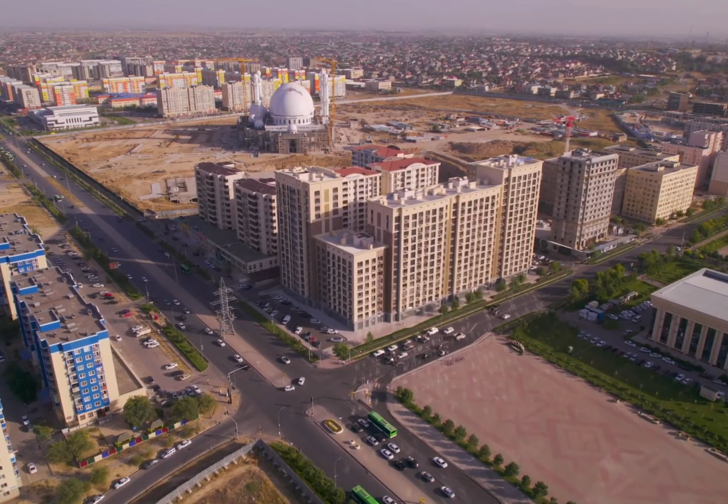Today, Shymkent's economy is diverse, with strong sectors in pharmaceuticals, food processing, and metallurgy, reflecting its ongoing development and modernization efforts. The city has also become a center for cultural activities, hosting numerous festivals that celebrate Kazakh traditions, music, and art, thereby preserving its rich cultural heritage while embracing modernity. As a city that seamlessly blends its historical roots with a forward-looking vision, Shymkent embodies the dynamic spirit of Kazakhstan, making it a fascinating subject of study for those interested in the intersections of history, culture, and economic growth in Central Asia.

A modernized tulip, embodying the characteristics of biodiversity, photovoltaic potential for renewable energy, and digitization in line with a smart city, was selected as the emblem for the project.

Being one of the fastest-growing cities in Kazakhstan, Shymkent has a demand for urban planning of new microdistricts. This video presents the urban development strategy for the new neighborhood of Shymkent City, developed by a joint interdisciplinary team of frame art and urban sustain architects, led by architect Alexandr Khvan and urban planner Roman Pomazan.

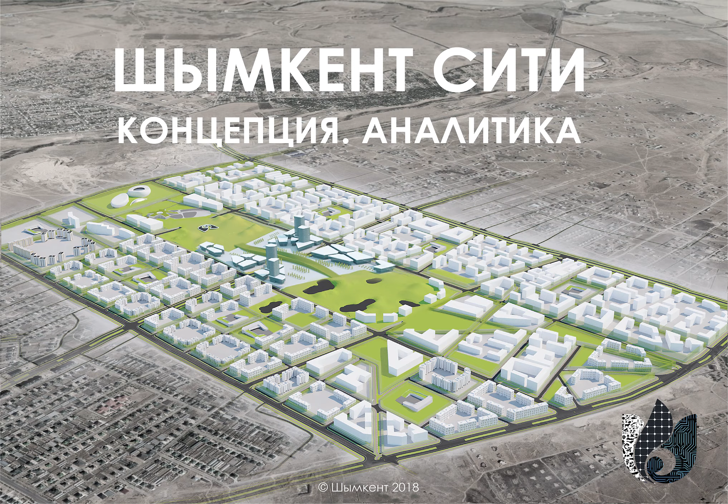The strategy examines domains of urban planning and architecture, transport, culture and creative industries, natural environment, and participatory development, applying to the new neighborhood and the entire metropolis. Except the strategy, the project consists of the analytic and planning stages.

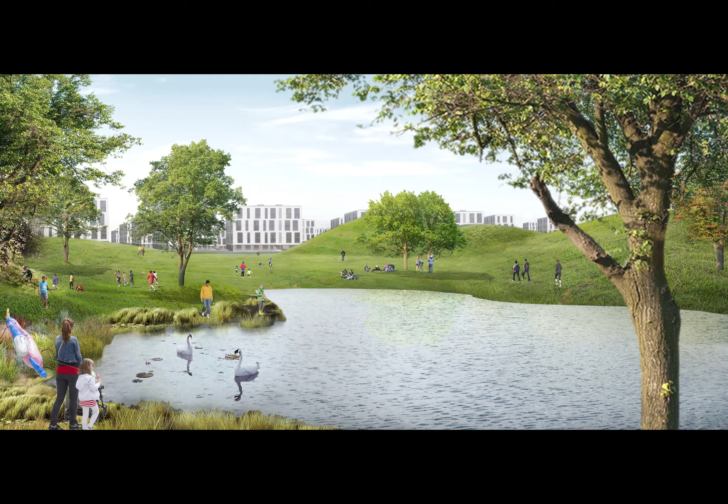In the last decade, a tulip was chosen as a symbol of the metropolis, owing to the endemic species of wild tulips that are ancestors to all modern varieties of tulips.

During the analytical phase, we evaluated the conditions and potential of Shymkent, which included workshops, analysis of the urban core and social fabric, green and gray infrastructure, economics, culture and city values, as well as sociological and anthropological studies, and the brief evaluation of the cultural and creative industries.

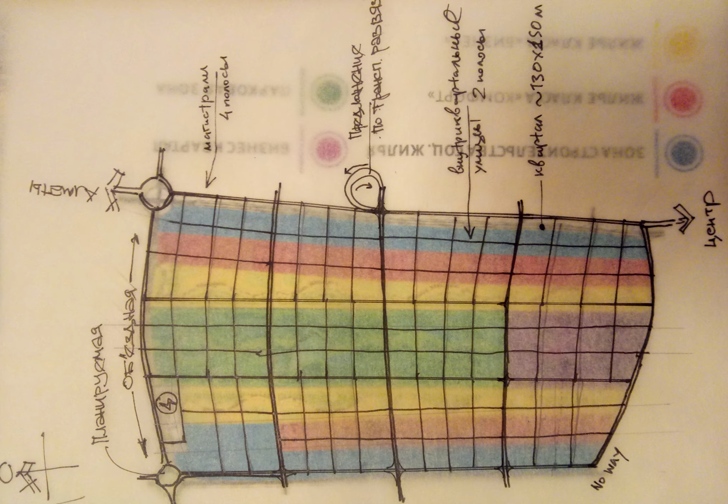First, we conducted a field trip to identify the value of the natural landscape, key nodes, and to meet with stakeholders. The local business association, international real estate holdings, regional sports association, and local hospitality companies were the main stakeholders of the project.

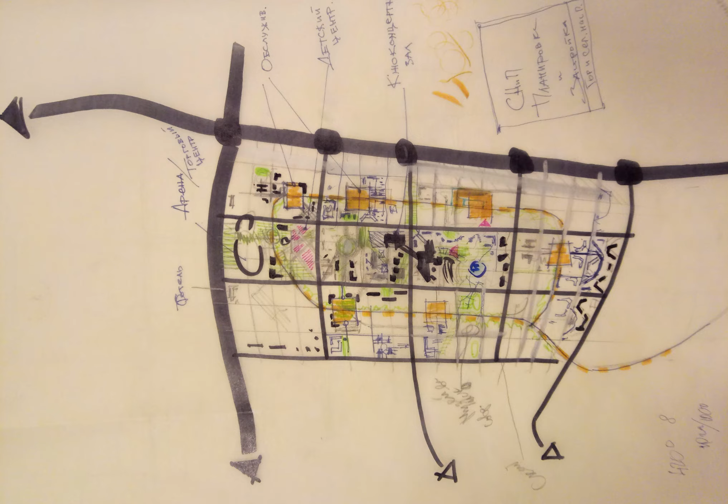The initial workshop aimed to generate a variety of zoning plans, which would then be overlaid with analysis data for further detailed elaboration of a selected option.

The designated plot already included several households, commercial entities, and social housing units. Additional challenges included public transport connections and the placement of large urban nodes for sports, entertainment, and the business district.

The urban studies begin with the evaluation of city designs across the entire metropolis, identifying several historical cores of medieval towns, traditional and modernist cities, and rural developments. Among these, to the north, lies Shymkent City.

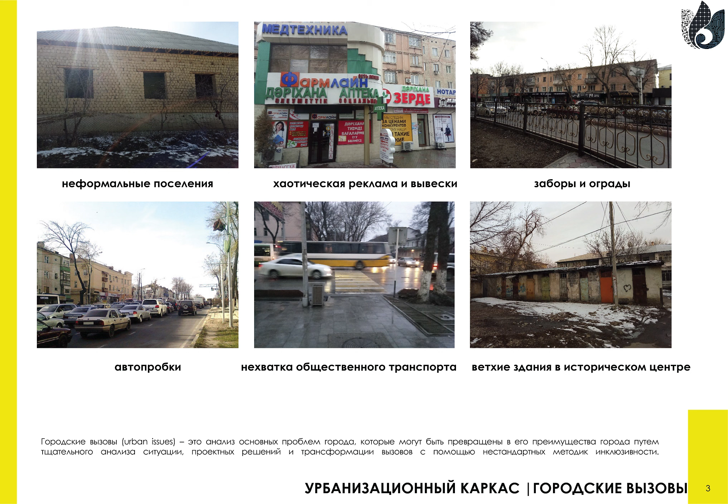The analysis of urban issues identified 12 main concerns: water access, public transport, waste access, urban sprawl and informal settlements, traffic jams, and several others.

Transport studies revealed the project site's relation to main logistic nodes and lines. It was revealed that the city project lays quite far from the central transport hub and needs a new transport rail and bus hub. Studies of the social fabric unveiled the existing and future connections of the site to the old center via a chain of public spaces.

Future expansion of them throughout the project fabric could sufficiently raise up the quality of urban environment.

Nature studies identified potential green belts, relevance to an ecoregion, and endemic species. Semi-arid dry climate and scarce clay soils highlighted the value of greenery and water sources and the need to revitalize the planned area with biodiversity design.

Economic studies reflected trends in population growth, demography, occupancy split, main economic industries, industrial zones, and the macro and microeconomic context, as well as the real estate market.

In 2018, Shymkent was approaching the 1 million citizens mark, which anticipated the transformation of the metropolis into a city with special status. Cultural studies define the metropolis as a cognitive map, key cultural authentic features and values, and the genius loci.

While the history of Shymkent dates back to the 6th century, there are several medieval fortifications, examples of vernacular Central Asian wooden architecture, and valuable modernist buildings from the 1970s to the 1990s.

Anthropological studies uncovered the regional tourism potential, festivals, local communities, toy and entrepreneurship traditions, and the cultural and creative industries. A distinguishable feature of locals is the trend to live in mahallas, low-rise micro-communities that amalgamate all family members and contribute to the urban sprawl tendency.

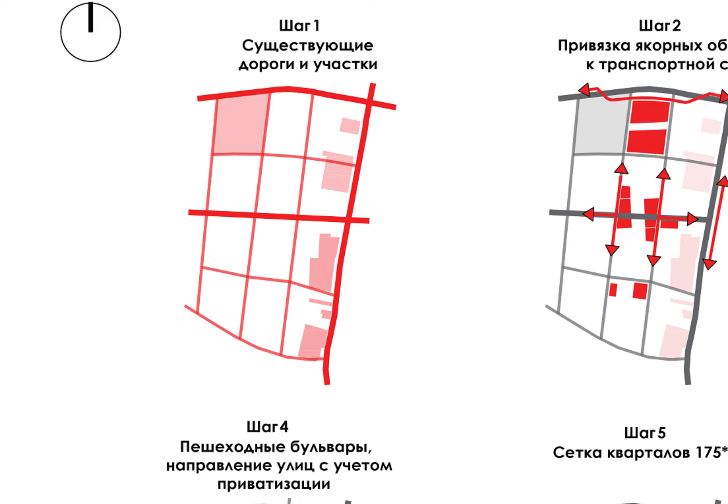The strategy of blocks commences with the morphology development of the Shymkent City urban grid. First, we identified all already booked land plots and existing households, as well as planned roads. Second, we linked anchor nodes to the grid.

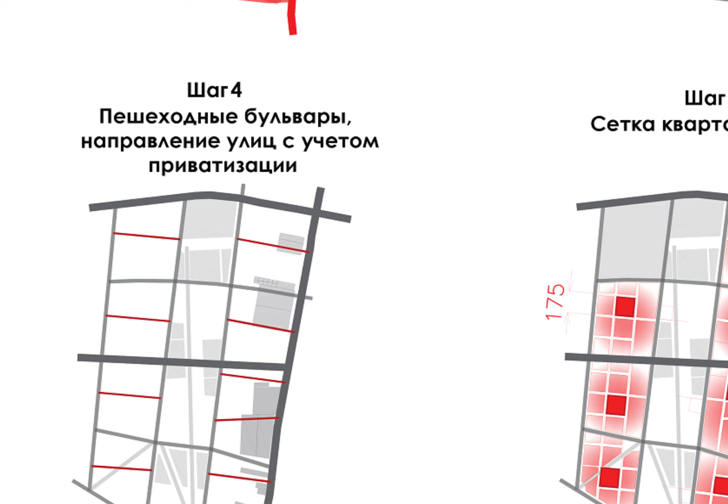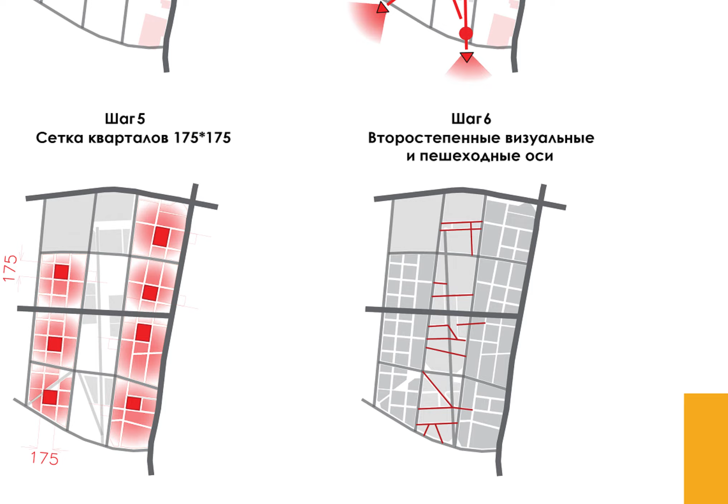Third, we figured out the geometry of visual axes and viewpoints, and corrected the grid. Fourth, considering the existing tenure plan, we added pedestrian passages. Fifth, we added a human scale grid of blocks similar to the Barcelona standard. Sixth, we evaluated secondary pedestrian connections and auxiliary streets.

Next, we developed the master plan and identified key anchor buildings. Following that, the block strategy outlined the functional zoning plan and height regulations.

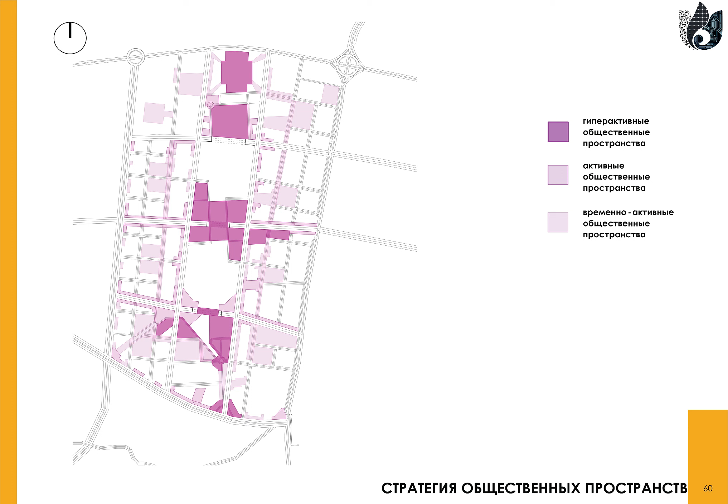The public spaces strategy presented a vision for the future public realm, categorizing areas by their level of activity from hyperactive to temporarily active. The priority strategy proposed a phased development schedule for the blocks.

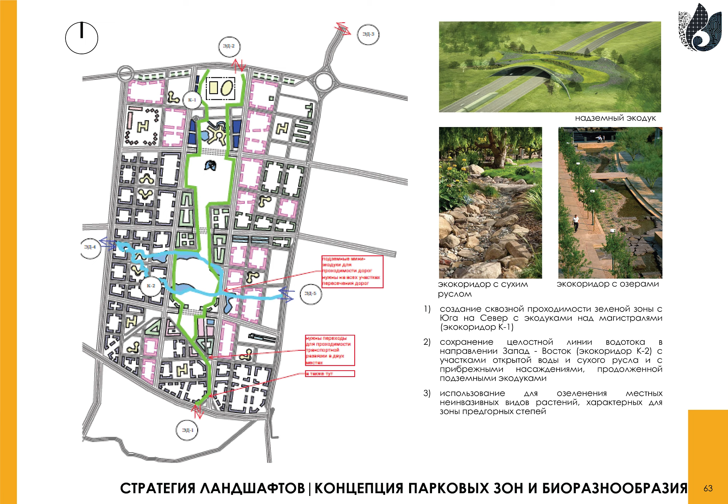The landscape strategy emphasized creating green belts that weave through the area, incorporating wildlife crossings and artificial water bodies. The Shymkent City Green Belt is designed to integrate with the broader metropolitan green infrastructure, including the Dendra Park and the Badam River, to improve animal migration through the urbanized area.

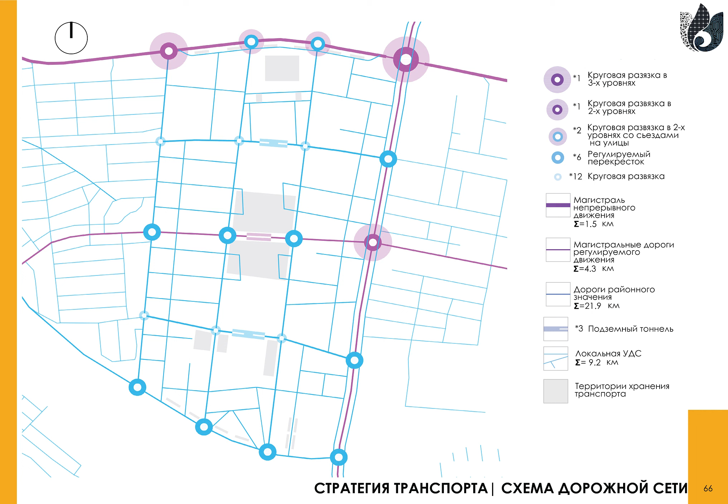The transport strategy outlined a hierarchy of transport nodes and connections within the urban grid, including large parking areas and underground sections of highways beneath the central area.

In line with this strategy, we suggested repurposing the existing narrow-gauge railway from the Dendra Park to the Old Center, extending it into Shymkent City with a loop, and creating a dedicated BRT, bus rapid transit, line to Shymkent Airport.

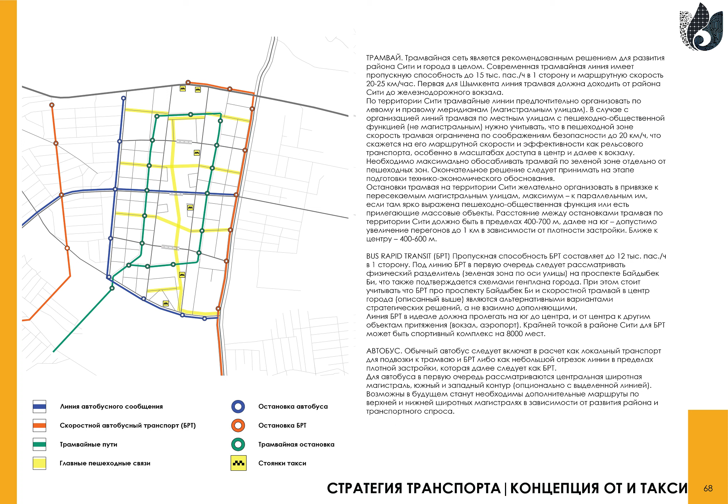The strategy also detailed the development of public transportation, encompassing bus rapid transit routes, light rail tram lines, bus networks, and pathways for pedestrians and cyclists.

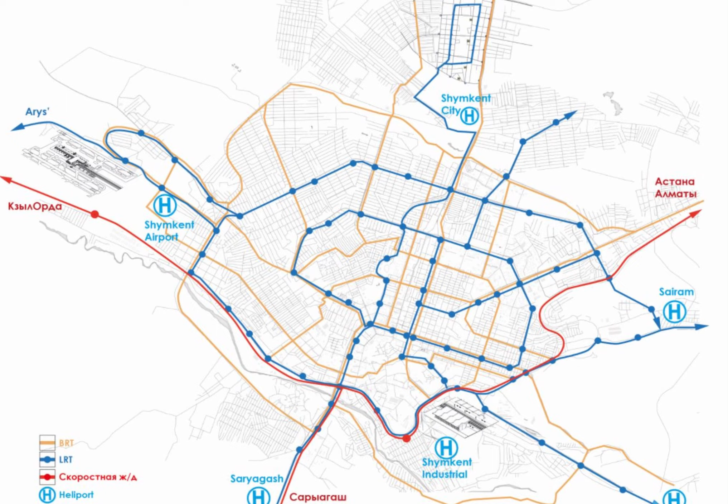Moreover, the strategy proposes a comprehensive update to the metropolitan transit system, including the addition of bus rapid transit (BRT) and bus rapid transit (BRT) systems, alongside an extensive bicycle network.

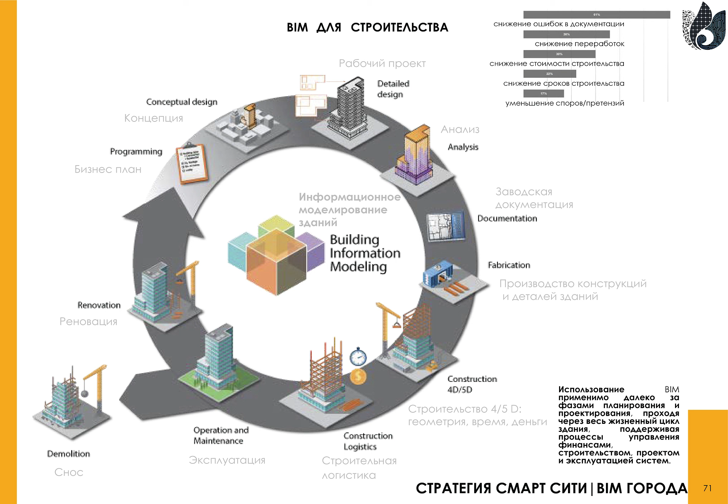The Smart City strategy outlines crucial phases for implementing building information modeling and applying green building standards.

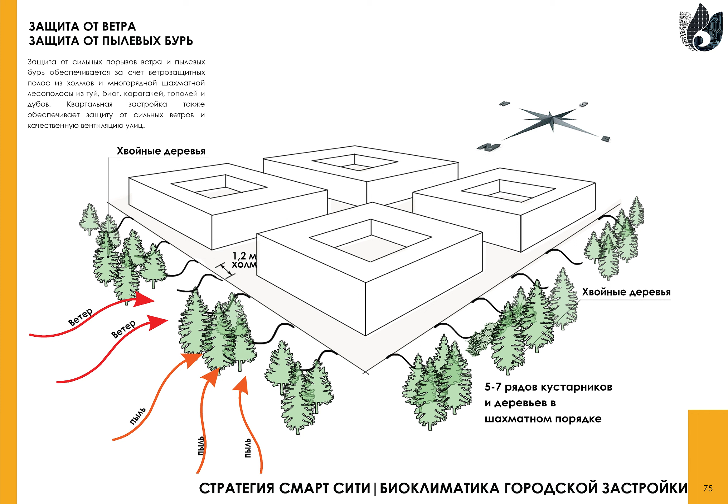The bioclimatic aspect of the strategy focuses on architectural design principles suitable for a semi-arid climate, such as intensive shading, natural ventilation, wind catcher towers, dust and wind protection through drought-resistant greenery, and nature-based solutions like green roofs, permeable pavement, and water channels.

Expanding beyond the scope of the project, the Smart City strategy aims to involve communities in revitalizing green infrastructure through festivals and neighborhood celebrations.

The participation strategy identifies 2 main categories of stakeholders: direct stakeholders, including a special project enterprise, international construction development companies, and financial institutions, and mediated stakeholders, divided into groups such as small and medium enterprises, creative industries, business corporations, student youth, traditional communities, and the media.

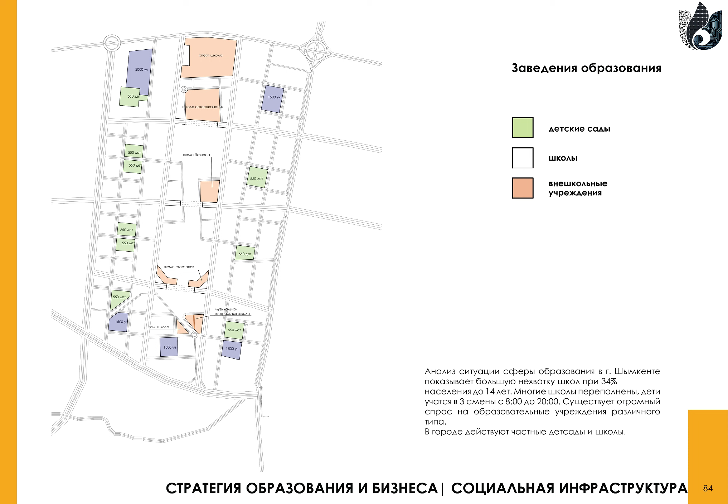The business and education strategy highlighted the development of schools, kindergartens, and extracurricular institutions, marking a significant investment in the future of education and industry collaboration.

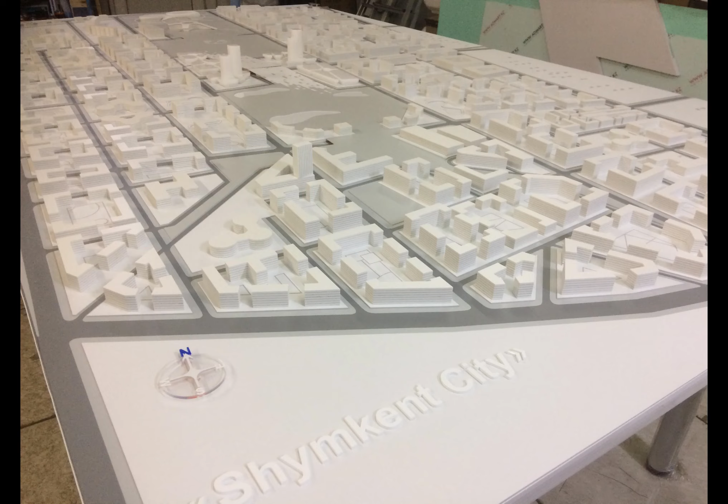During the planning phase of Shymkent City, the team detailed anchor projects, bioclimatic design principles, and specifics of landscape and public spaces, including plant selection.

To kick things off, a workshop was held with key stakeholders and real estate development companies to establish a foundation for successful implementation and to incorporate specific features.

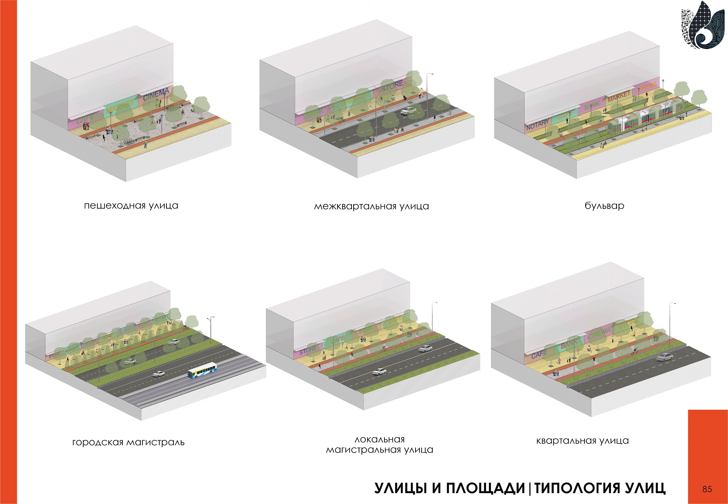Notably, the Shymkent City Planning Guide identified 6 main street typologies: city highways, collector streets, residential streets, pedestrian streets, interblock streets, and pedestrian boulevards with bus rapid transit (BRT), all of which included bicycle lanes.

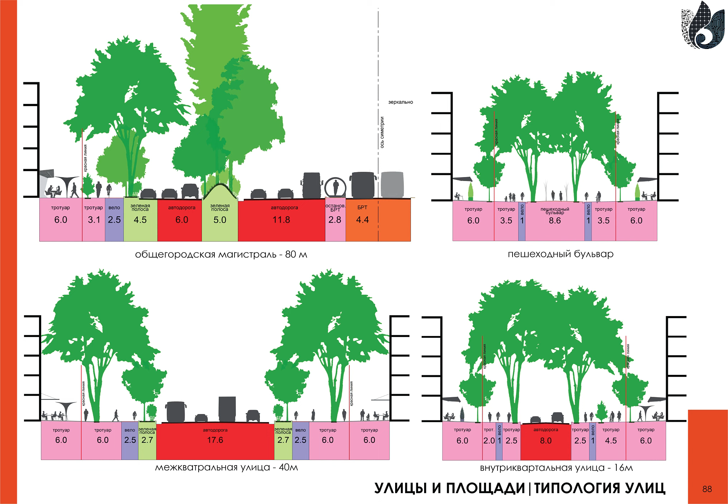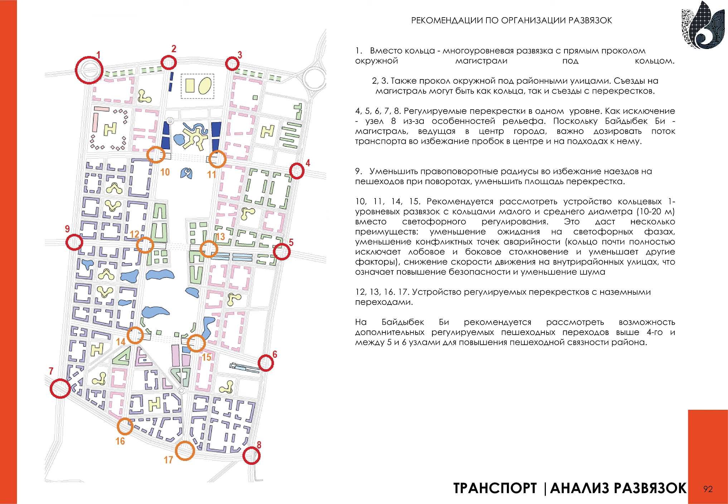Furthermore, the Transportation Planning Guide laid out essential principles for safe street crossings, adhering to the National Association of City Transportation Officials (NACTO) standards, and provided detailed designs for roundabouts, categorizing them into multi-level, regulated, and self-regulated types. It also included calculations for car parking lots and their spatial arrangement.

The landscape section of the planning guide detailed the implementation of dust protection barriers using plants, conducted dendrological feasibility studies, and specified the exact species of grasses, flowers, bushes, and trees to be planted throughout the project's landscape.